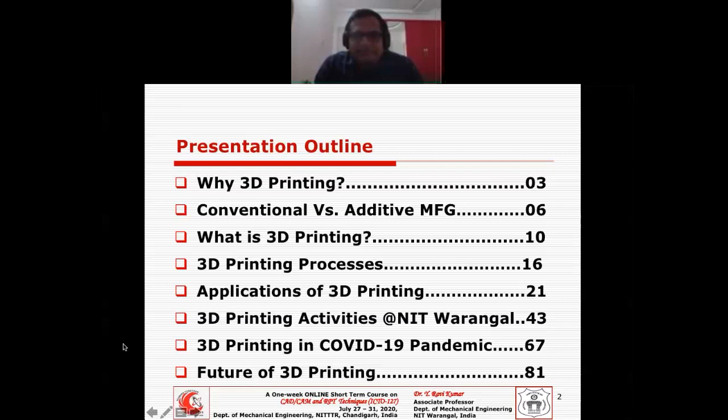And now we are under the pandemic, that is COVID-19. So under the COVID-19 pandemic, what role should 3D printing or the 3D printing community as such play? That also we'll discuss, the role of 3D printing under this COVID-19 pandemic. And finally, we'll discuss what could be the future of this 3D printing technology. So this much I have planned for this session. So let me move to the next one.

So why 3D printing? Why do you need 3D printing technology? That is the point here to discuss. So then we need to recollect the history of industrialization. If you see the time scale, during the 1780s to 1860s, that was the first industrial revolution, when the cottage industry, or when James Watt invented the steam engine. The energy used was steam or water.

So the idea of Industry 1.0 is mechanization, meaning replacing human muscle power with machines. That's called mechanization. So mechanical production systems came into the picture during the first industrial revolution. Then in the second industrial revolution, steam and water power were replaced with electric power. And of course, the concept of assembly lines, where Henry Ford at Ford Company started the assembly line concept. That was the second industrial revolution, called Industry 2.0, during the 1870s to 1960.

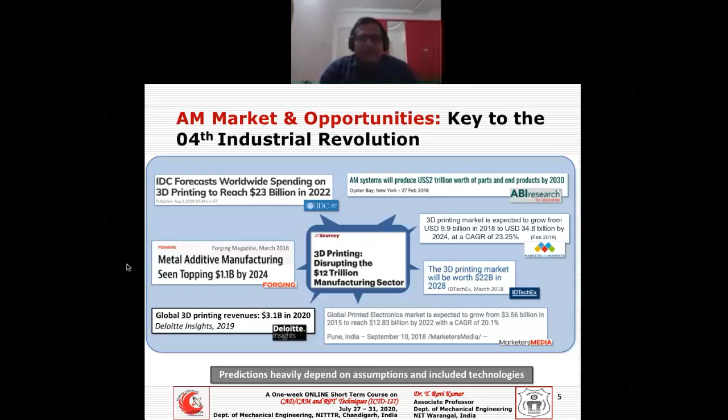So with that background, why additive? Why can't it be a conventional manufacturing process? Let us discuss the difference between conventional manufacturing systems and additive manufacturing systems. If you recollect the classification of manufacturing systems, we can broadly classify one as subtractive. Subtractive, as you know, for example, is machining.

There we take the raw material as a bar stock, and then we use tools to continuously remove or subtract material from the bar stock, and we need to remove a lot of material in order to get the required size and shape. And sometimes we need to design and fabricate fixtures to hold your workpiece.

The major concern in subtractive is scrap, which depends on the complexity. The complexity is directly proportional to the amount of scrap. That is the major concern. Of course, we also need to check for tools, jigs, fixtures, and so on.

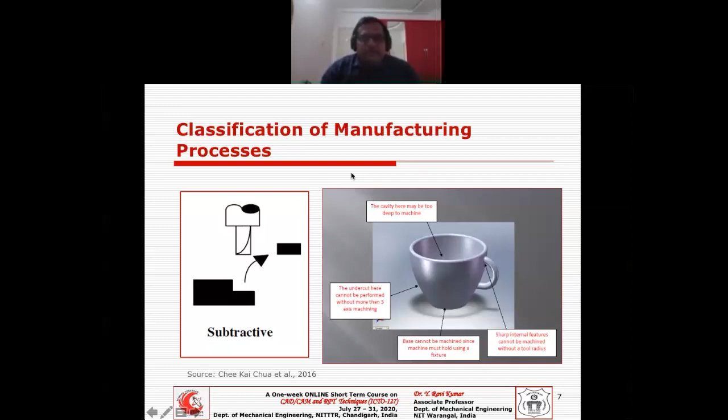And you have a very sharp internal feature here, so we need to go with tool radius compensation and things like that. These are some of the constraints we need to plan very well before starting the subtractive process. Whereas if you want to do the same thing through additive manufacturing, we don't bother about the constraints we discussed previously.

But what we need in additive is, say you have a simple step like this, I can discretize it into layers. Say I can have layer 1 and layer 2, and by using some kind of energy source, I can bond these 2 layers. So that's what you do in additive manufacturing.

So then we need not worry about the tools, not about the jigs and fixtures, and literally no scrap. Why? Because you are adding as per the requirement. So you are not removing anything here.

And of course you may have another kind of manufacturing system called formative. In formative, for example forging or casting, we need to make a die of the shape you are looking to fabricate. So we need to design and fabricate a die for each and every component you want to make with the formative process. And again, you may use a subtractive process to make the die.

So in the case of a formative process, we need to design and fabricate the die. But in the case of additive, you don't require any die to design and fabricate. We need only the machine and the digital model or the CAD model of your part.

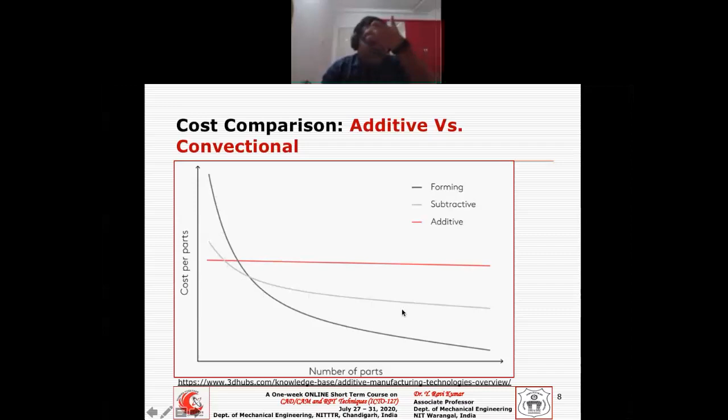And then you may wonder what the cost of additive manufacturing is compared with the formative and subtractive processes. If you draw the graph between the cost per part and the number of parts, for formative or subtractive you find a similar trend: if you increase the number of parts, your cost per part reduces exponentially.

But that is not the case with additive manufacturing. It may not reduce drastically; it is like a straight line, sloping slightly downwards. That is the trend we can expect from additive manufacturing for cost versus number of parts.

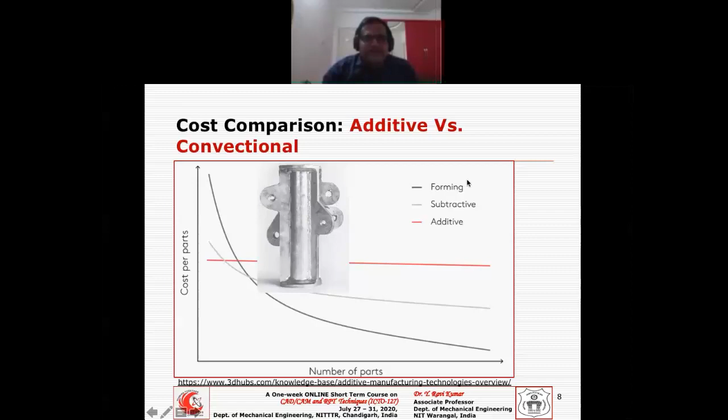But let me introduce one more parameter called complexity. Say my part is a cylindrical one with simple standard forms; then I can easily machine it or go with the formative process. But my product is like this. If you compare these two products, of course this one is more complex.

Why? Because this design is not a conventional design, rather it's a bionic design. The designer might have been inspired by nature or cell biology. It's an organic or bionic design, so of course it is very complex. If the complexity increases, you have to struggle a lot with the formative or subtractive process.

My intention with this slide is: if you take the additive manufacturing route, whether your product is a standard cylindrical shape or a bionic design, it doesn't care. It takes almost similar effort to fabricate either design. That is the biggest advantage of the additive manufacturing route.

And when do you choose additive manufacturing or 3D printing? If you draw the plot between complexity and quantity: if your complexity is very high and you need relatively few parts, 3D printing is the better choice. If complexity is medium and quantity is medium, CNC machining is the right choice.

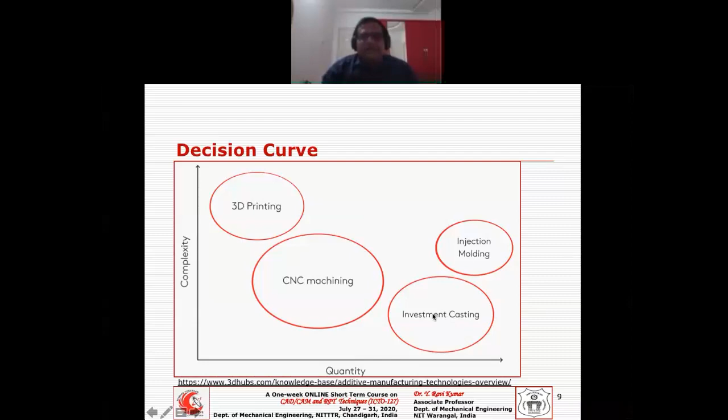But you can integrate these processes with 3D printing. In injection molding, I can make a die or a tool through 3D printing. And in investment casting, if you want to make the wax pattern, you can 3D print it. So it depends on the situation, application, or requirement.

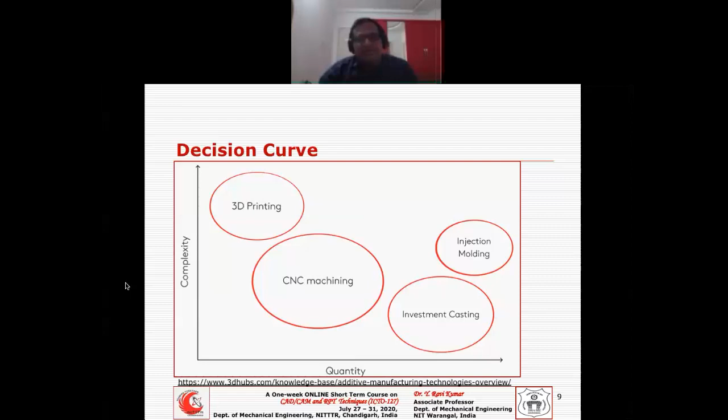So then you can choose the appropriate, or you can combine these technologies also as per your requirement. So then what is 3D printing? What are the various steps involved in 3D printing? So the idea of 3D printing has come again from nature. Normally, these inventors, or the so-called people who invent any technology, definitely may be inspired by nature.

Say, for example, how these seashells are formed. If you closely watch, they got formed layer by layer. It is not overnight it got formed like this. Over a period of days or months together, it might have formed layer by layer, and that too, nature got it 3D printed. So basically we can put it in that way. These are the best examples where nature has printed for us.

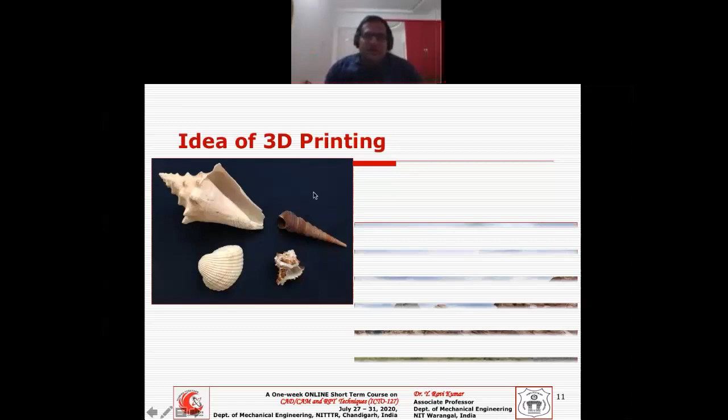And of course, we can have one more observation. How are these rocks formed? These rocks are formed by the erosion of the soil. That is not formed overnight, right? Over a period of days together, this erosion may happen, the soil got eroded and it may form layer by layer. So this is another example where nature has printed these kinds of products.

And of course, this man called Charles Hull. He might have been inspired by nature, but in 1982 there was a requirement for him to make a prototype, rather to make a plastic part very quickly. So that was the requirement. Necessity is the mother of invention, right? You know that. So with the requirement of making plastic parts, a prototype, he started experimenting through these kinds of systems

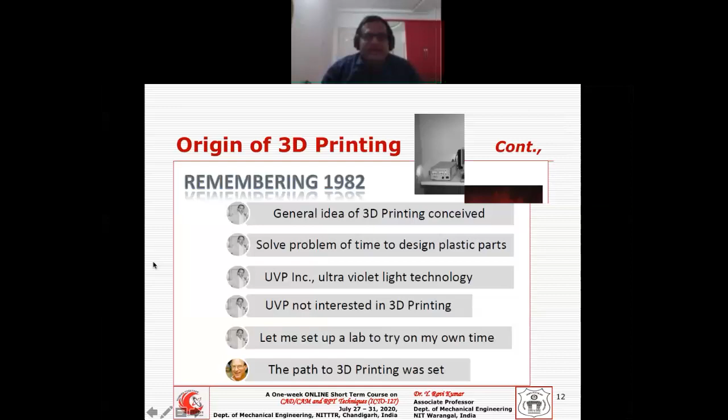during 1982, where he took some epoxy photosensitive polymer resin and started exposing it to UV light, and he found that the liquid is getting converted into solid; the solidification is happening because the epoxy resin got exposed to the UV light. So that was the origin, the history, and then this man filed the patent in 1982 with that idea, and he himself started a company called 3D Systems in 1988.

This technology is very popular, you know, stereolithography, called SLA. SLA was the first 3D printing technology. Commercially it was introduced by 3D Systems, by the same guy, Charles Hull, with the SLA 250 system, which we can see is the first 3D printer or rapid prototyping machine for mankind. And incidentally, he invented the STL file. The STL file is the de facto standard.

So now you are familiar with these terms, right? Rapid prototyping, additive manufacturing, and 3D printing. Whatever you call this technology, we need to have a CAD model, or a digital blueprint, to fabricate a physical object. First we need to start with some modeling technique, like a surface model or solid model or whatever it is. You start with the digital model, and then you fabricate and use it for the application. So that is one route.

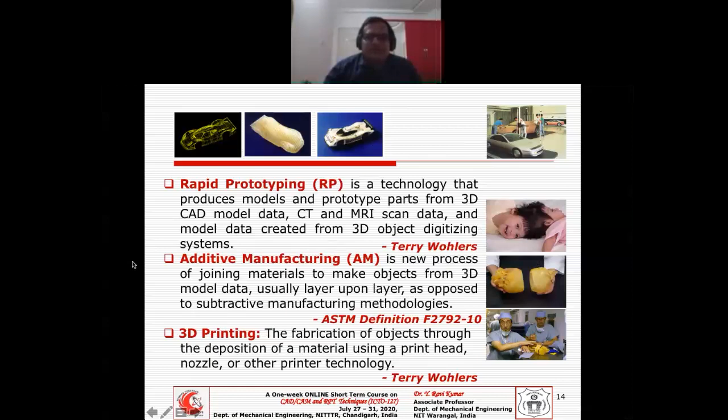So definitely 3D scanning, or reverse engineering, is another area where you can get digital data or point cloud data, and further you convert it into a CAD model and then you can print it. So that is another interface, through reverse engineering or digitizing systems. So you can come by any route, and then we can make a physical object using that CAD model or digital model.

And coming to the various steps involved in a 3D printing process. In this process, first we need to identify what the application will be. Say, for example, I want to sip a coffee. So I need to have a mug, a coffee cup, basically. So that is my application. My application is to sip a coffee. So then I can go to any CAD modeling software.

Nowadays, these softwares are very handy, and they are cloud-based or even browser-based, or even with your cell phone you can model very easily nowadays, free of cost. You have Google SketchUp, or you have Onshape, and you have other modeling softwares which are open, and they are cloud-based or browser-based, in fact. So then we can easily make this kind of a solid model. That's not a big deal now.

So once you have a CAD model, there itself you can save this CAD file as STL, .stl, that is a triangular model. So you save this triangular model called STL. Why? Because a 3D printer can understand only the triangular mesh language, or the STL file. So you save it then and there in the software itself as an STL file.

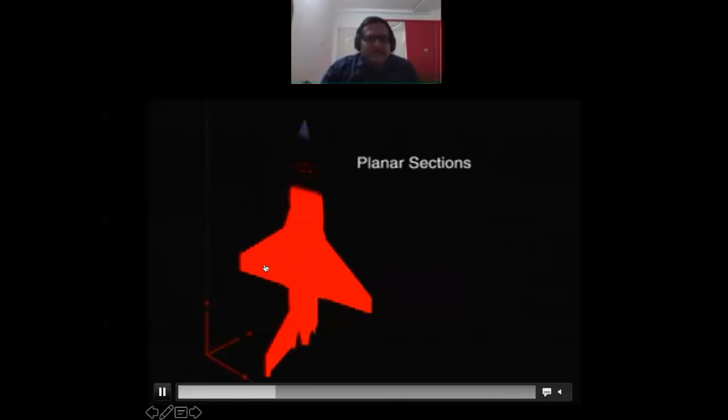Anyway, we need to fix the orientation and slice the model into layers, which is done in the software. So you slice the model into layers, and if there's an overhang portion, I need to give some supports. Once you've done the supporting, fixing the orientation, and slicing, then we need to generate a tool path, something like a G-code.

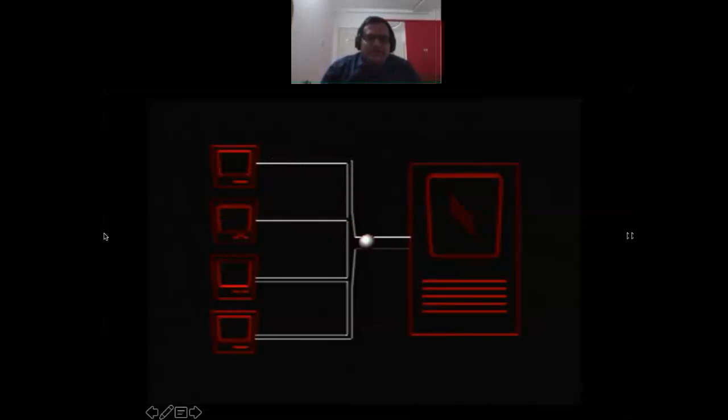But we are not writing any code here, the software will automatically generate it. That code will be sent to the machine. As I already said, this is FDM technology, and the raw material is a filament, basically in wire or filament form.

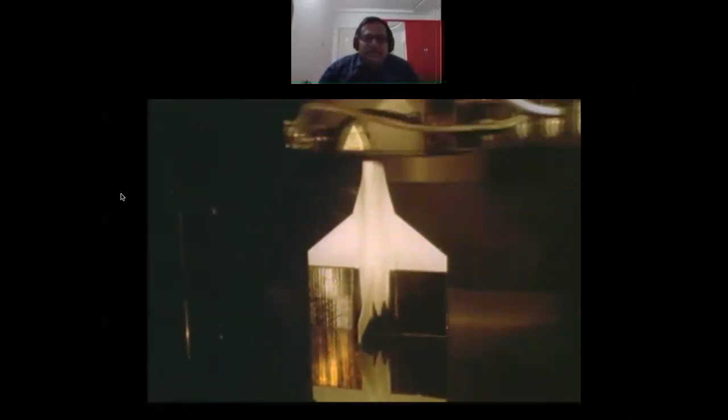So that plastic filament will come and get heated, rather melted, and come in a semi-solid or liquefied state. It falls onto the platform, one layer upon another, and gets fused layer upon layer. Once the first layer to the last layer is completed, and I have some supports which I've given, once I remove that support, my part—you can call it a prototype, a model, a component, or a product.

Nowadays you can use plastic also as one of the direct end-usage parts. So that is about polymer printing.

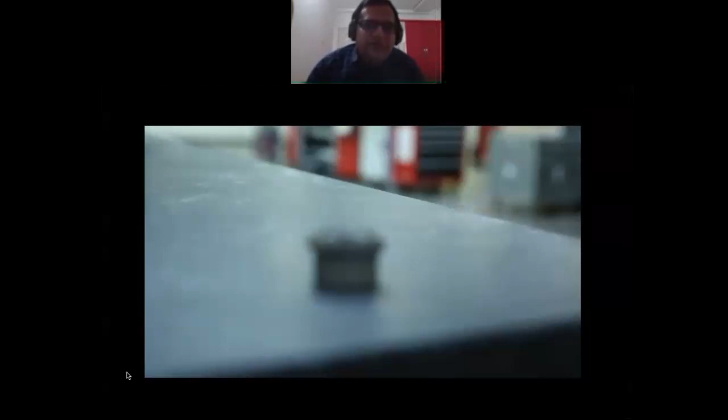And nowadays you can even print in metals. So metal printing is happening. The raw material here may be a powder—you can see this metal part, stainless steel 17-4 steel, where the raw material was taken as a powder. From powder to the product, the metal product like this, we can convert.

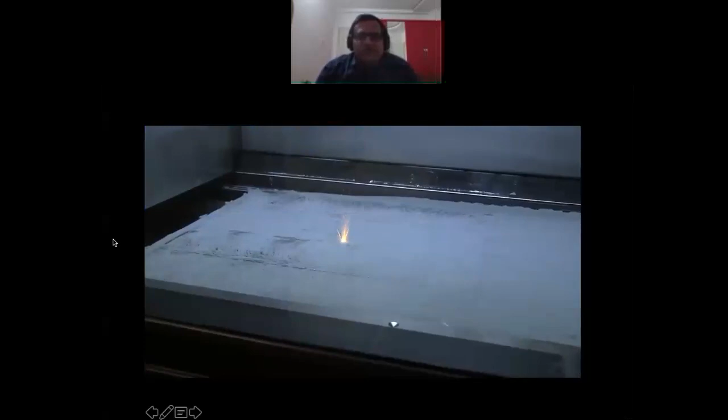So how do you convert? Here you may use a laser to melt these powder particles, and finally you're going to make this kind of metal part.

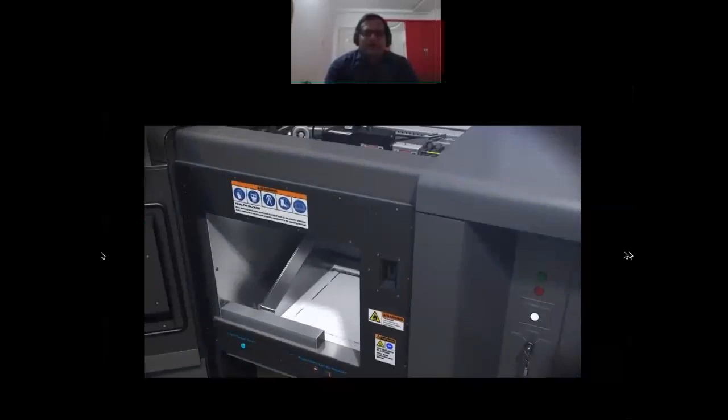So of course, whether it is a polymer or a metal, we need to start with a CAD model. In the CAD model, we need to slice them. But that slicing layer thickness may be less here compared with the previous FDM technology. It depends on whether you are processing a polymer, metal, composite, ceramic, or even biological cells.

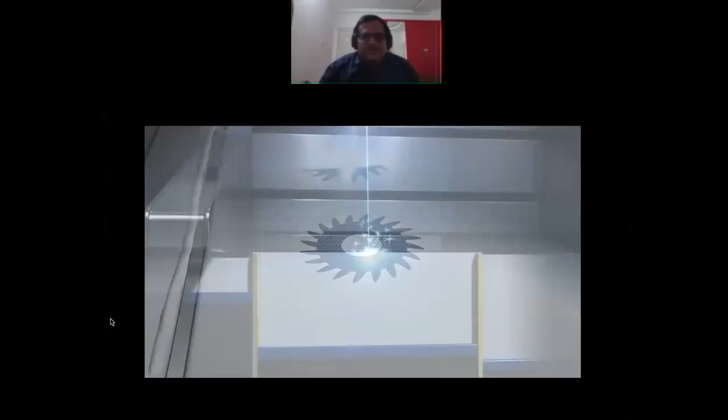The recoater will spread the powder particle onto the bed, and the laser will come and trace the cross section, which you already defined in the software. As for that cross section, the laser will only melt those powder particles according to the cross section. Once one layer is over, it comes down to the next layer, and so on, from the first layer to the last layer, as your laser melts.

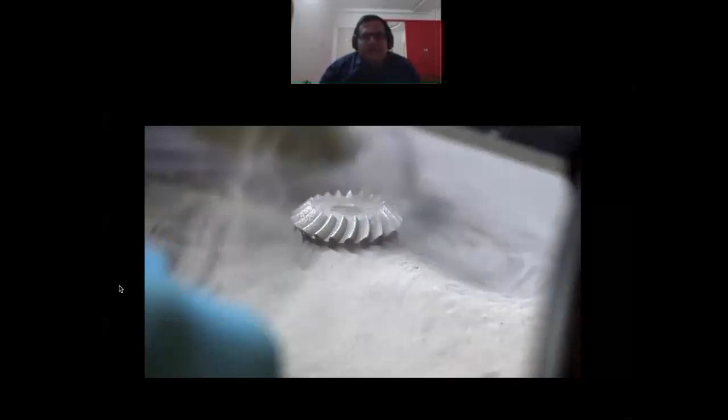We can reuse that metal powder actually. Wherever you have a cake of powder, you might have used only a small portion, so then you can reuse that powder.

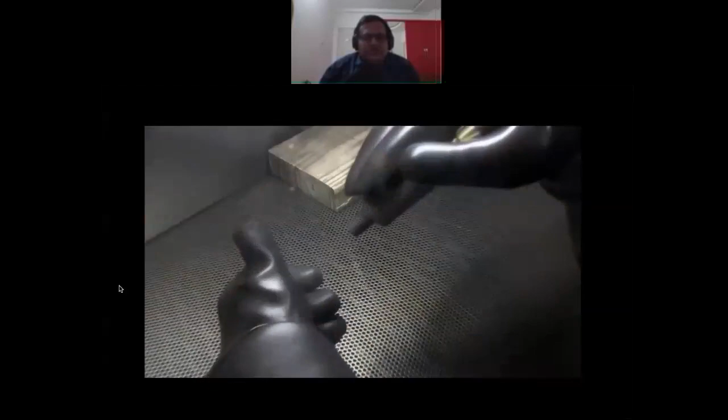Then you take out the part from the substrate and remove the supports, either by hand or using some kind of wire cut, hand filing, or finishing tools. Of course, use sandblasting or shot peening methods to enhance the surface finish or quality of the part. Sometimes you may also use furnace treatment to improve the metallurgical properties.

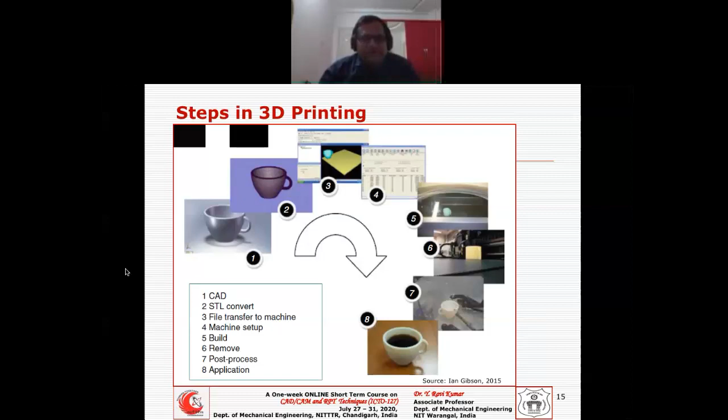So this is what you do, either for polymer printing or metal printing, or even the same case for composites, or the same case for ceramics. You can do it absolutely, no problem.

Then we'll discuss some of the 3D printing processes. As we have seen in the previous video, we could process polymers using technology like FDM, and you can even process metals. Some technologies like binder jetting let you process ceramics, and of course you can process composites again from FDM or from the binder jetting process. Not only the standard polymer, metal, and ceramic composites—you can even print functional materials like electronic materials or shape memory alloys.

Nowadays you have smart materials like shape memory alloys, or electrogels, or other things which we can even print. And not only functional materials, we can even print biological materials like cells or tissues, or food can also be printed. This is one of the most interesting areas where you can even prepare your food. So, to name a few, these are some of the materials.

And the raw material form, as we have seen in the previous video, may be a powder in one case, a filament as in FDM technology, a sheet, or even a liquid. You have 7 classifications broadly by ASTM. Of course, there are different technologies and different proprietary and trademark names, but broadly it should be any one of these 7 processes.

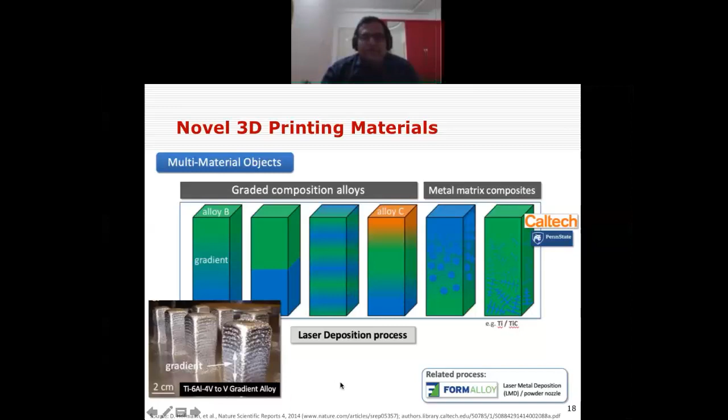So then you use the 3D printing or additive manufacturing process accordingly. Nowadays, with Industry 4.0, your manufacturing facility should be smart enough - you must create sensors, an in-situ monitoring system, or a closed loop feedback system, so we can closely monitor the process, and if something goes wrong, automatically correct those defects. That's how smart manufacturing is incorporated. You can have artificial intelligence, machine learning, and deep learning techniques to understand the process and automate it, to make it smart. So then we need data analysis and artificial intelligence support, and you can incorporate this kind of intelligence into your 3D printing technology.

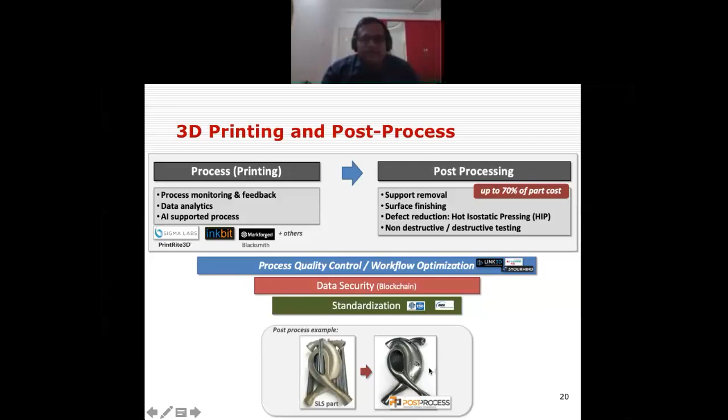So this is a brief, and then let us come to the next topic on 3D printing applications. So far we have discussed the need for 3D printing, traditional versus additive manufacturing process, various steps involved, various materials and processes, pre-processing, processing, and post-processing. Now we'll find out the applications of this 3D printing or additive manufacturing technology.

And if you see each and every area, like you talk of prototyping, time is most important. We need to quickly produce our design development, the product development should be faster, right? So then definitely in 3D printing we have less supply chains. In case of prototyping, using 3D printing is more faster and less expensive, and may allow complex designs also, which otherwise is not possible with the conventional process.

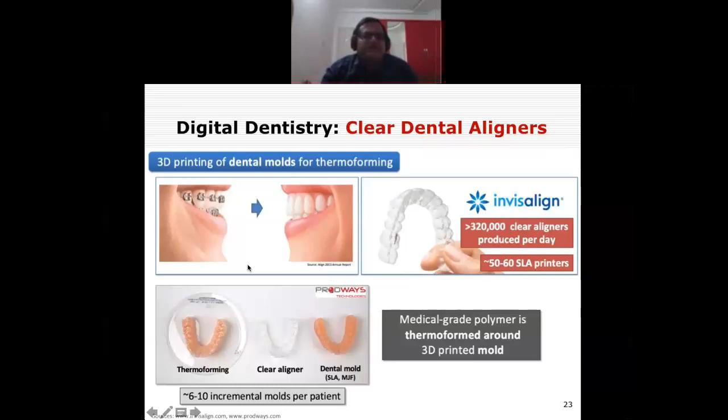So you have huge potential in a country like India to have a business setup. Nowadays these 3D printers are very low cost. You normally use SLA technology for this. DLP technology is very cheap nowadays; you can have a DLP machine for 2 lakhs or 3 lakhs, and the material is also very cheap now. You can even start a business in this domain. So that is another business potential.

And of course, you have hearing aids. For a hearing aid, normally there are standard sizes and shapes: L size, M size, XL or double XL. But 3D printing and 3D scanning will enable you to customize the size of the canal of a patient. They will scan the canal, and then you can print as per the size, shape, and geometry of the patient. So you have mass customization; millions of people may require these kinds of solutions.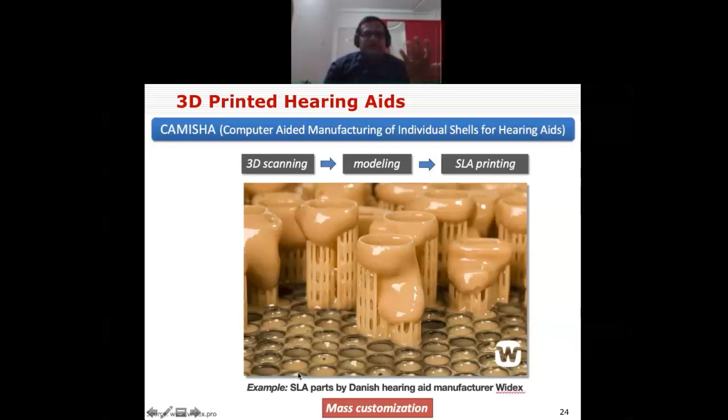So you have another big advantage if you use a scanning technique, modeling, and further use SLA or DLP technology to print it. It will give you a mass customized solution, a very good business strategy to adopt.

So it is almost like substituting the actual bone, but functionality and then how it is getting integrated. So you may have a bit of challenges, but it is quite an attractive field where the implantation will be done with 3D printed parts.

And you can use personalized medicines also for drug delivery systems. You can customize the dosage to the patient. So that is another area where 3D printing is helpful for medicine in general.

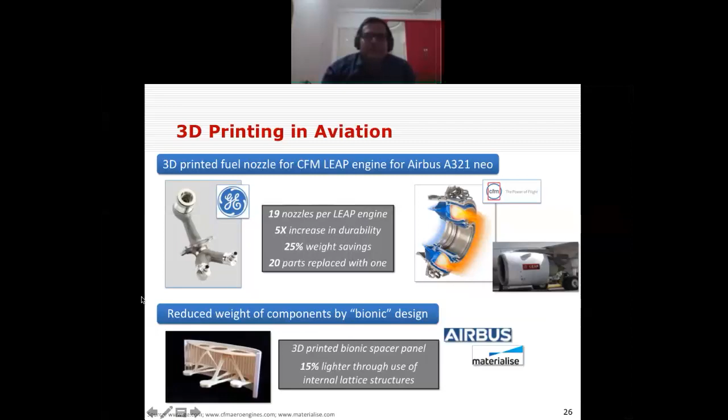And this is another case study where you will be using a gas turbine engine part as a 3D printed metal part. And of course, lightweighting is a bionic design, right? It means you will be inspired by nature, the bird or something like that, so you can further scoop out the material and reduce the weight. So it is either from Boeing or Airbus. They are claiming it is 15% lighter than the traditional designs. So like that, we have plenty of applications.

So very soon we are going to see these. The advantage here is that we can reduce a lot of supply chain, whereas traditionally we have to identify what kind of machine, who is the supplier, who is the manufacturer, who is the designer. So you have a lot of supply chain issues in traditional manufacturing. But here it's straightforward. You have a metal printer, you have a material, you have a design. Your job is done. You don't have much supply chain here, and of course the number of components is also reduced, as we know the previously 20 parts are reduced to a single part.

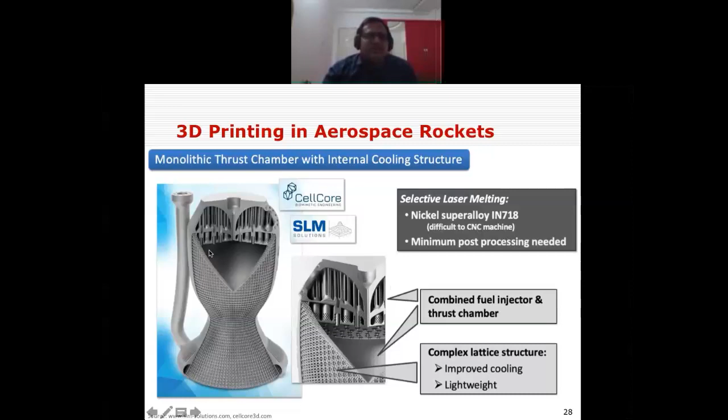And of course heat exchangers, the same logic will work out. We can make a lattice structure, which is very complex, rather than the bio-inspired designs. It's more lightweighting, and not only lightweighting, as you know with heat exchangers, the basic requirement is to extract the heat. And nowadays people are able to print even copper. Earlier it was a big problem printing copper, but now people are able to print in copper. As you know, copper is supposed to be a good conductor among all metals.

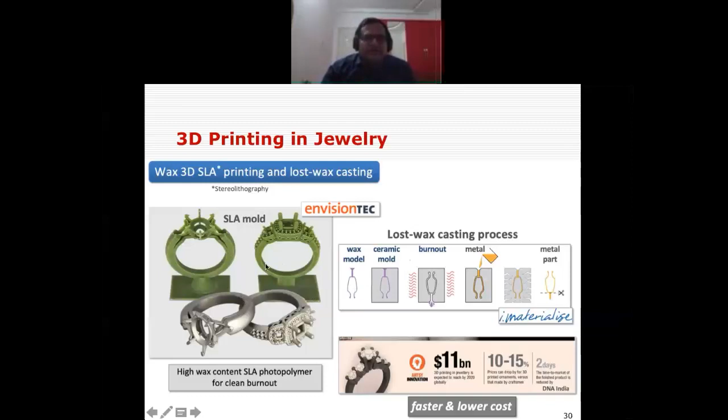So these are some of the 3D printing applications in jewelry. As I already mentioned, in India you have a very good scope. This is only from the Indian statistics. So you have plenty of customized designs. Normally you do investment casting, that's a wax pattern or sacrificial pattern through 3D printing, and then you can cast it. Otherwise now 3D printers can print directly even gold to some extent, and you can even print silver or platinum, titanium. So directly or indirectly through investment casting, you can make your customized designs.

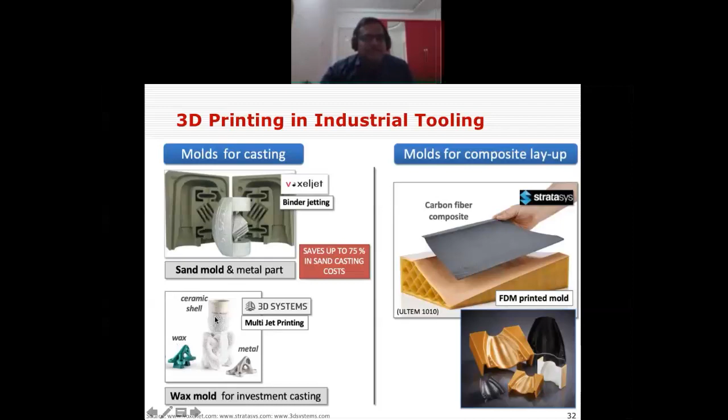Coming to the tooling area, you can make sand cores or sand molds through 3D printing, and further you can cast in metal. This is through the binder jetting process. You can save almost 75% of the cost if you go with sand casting. So that is the cost savings. And you are going to get properties on par with the cast product. And you have wax patterns, ceramic shells, metal parts, and some tooling applications.

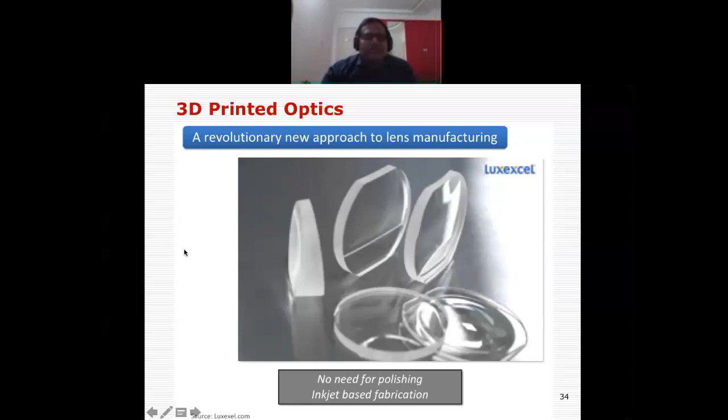And nowadays you can find 3D printed lenses also. Traditionally, polishing is a major challenge in lens making. But here it doesn't require any polishing, since it is 3D printed. So you have plenty of advantages once you come to the 3D printing route.

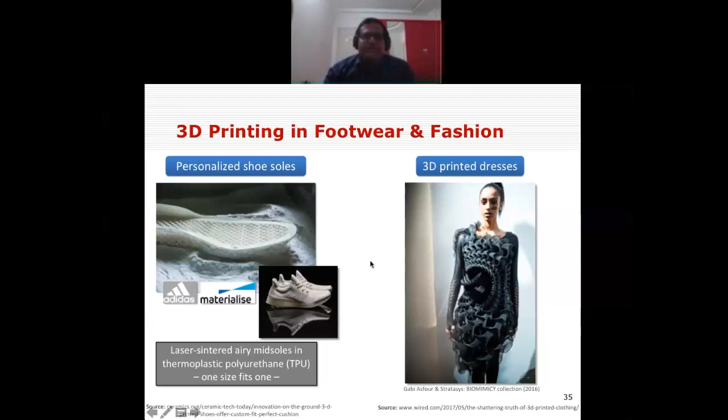You have personalization of shoes, like Adidas and Nike. They are coming out with printed lightweight lattice structure based soles. Maybe for athletes, or for diabetic patients, or arthritis patients who require a special design, as you know they have different pressure points, so it's going to give a good solution. And of course you have the 3D printed fashion industry, inspired by nature or bio-inspired designs, so you can 3D print these. And of course you have art applications of 3D printing.

And then you have some futuristic applications also, like now people are even able to print organs, 3D printed organs. So how do they do it?

So whether it is cardiac ventricles or other complex organs, people are targeting them. But anyway, this is at the initial stage. But some simple organs like skin and blood vessels, people are able to transplant, or people are able to repair those kinds of simple organs. But complex organs may take time.

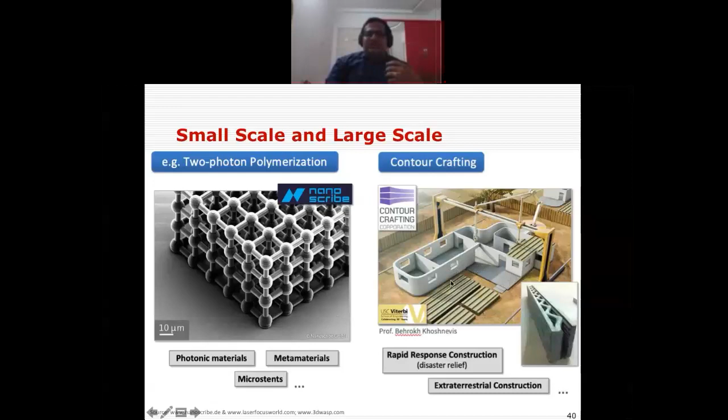And you have buildings or construction, with processes like contour crafting, with which you can even construct a building like this. So that is the biggest scale you can have, under the construction application for the construction industry. And of course you can have futuristic applications, where robots can be used to integrate with your 3D printing process to print structures like this.

The robots got integrated with 3D printing systems to print structures like this, from Nanyang Technological University, Singapore. They are developing it, and of course GXN Denmark. They are integrating unmanned aerial vehicles with 3D printing. As you know, the advantage of these robots or unmanned aerial vehicles is that they can crawl, swim and fly, right? So during any one of these actions, they can even 3D print.

So that is the basic idea, where you could integrate two cutting-edge technologies like robotics or unmanned aerial vehicles with 3D printing. So that is going to be a wonderful idea to work on in futuristic applications.

And let me come to the other application, as many of us are from an academic background. So how is this 3D printing technology helpful for education? Nowadays you have DIY kinds of 3D printers, thanks to the RepRap movement, after the patent of Scott Crump expired after 20 years. So then you can have an open-source kind of architecture.

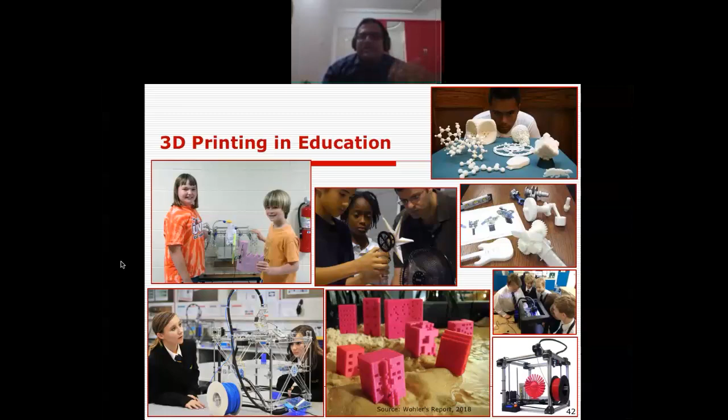For CAD models also, we will not design right from scratch. Probably the organizers have already given some forums where you can download CAD models free of cost, from repositories like Thingiverse, GrabCAD or MyMiniFactory. You have plenty of repositories or online 3D printing communities keeping these designs open. You can download standard designs or customize them, and use them for education or any other purpose.

And let me come to what we do at NIT Warangal with this 3D printing. Let me give a small glimpse of some of the activities. Coming to the facilities, we have a metal 3D printer from 3D Systems. And of course, NITTTR also has the same technology, and their machine may be bigger than ours.

So ours is the 100 and theirs is the 200 model, but the working principle is the same. That is a powder bed fusion technology from 3D Systems, which can process steel, aluminum, cobalt-chrome, titanium, and nickel-based alloys like Inconel. So you can very much process these metal powders on this metal 3D printer, or you can develop your own material to process on this metal 3D printer.

And of course, we have Stratasys-make FDM machines, the FDM Dimension series and FDM Mojo, and we have an Ultimaker 2 Plus machine, and we have a couple of scanners also. And we have a muffle furnace to treat the 3D printed metal parts, and a shot peening machine. And we have specific 3D printing software for the medical research which we do.

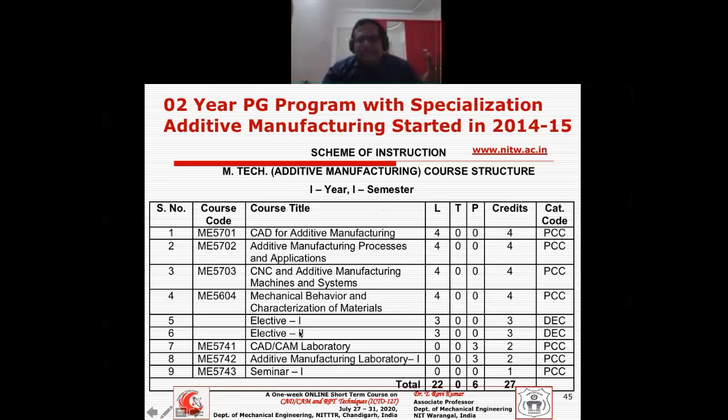Nowadays, AICTE is making compulsory, or rather optional, BE honors or minors in all 9 thrust areas, and additive manufacturing or 3D printing is one among them. If somebody is looking for such kind of activity, we at NIT Warangal are open. We have already developed around 27 credits in the first semester and 25 in the second semester, so we are able to help you frame a syllabus.

So just an idea of where you can integrate 3D printing technology in your student projects, like in automobile engineering or IC engines. Just a thought, you can even use it for any other application where it is appropriate.

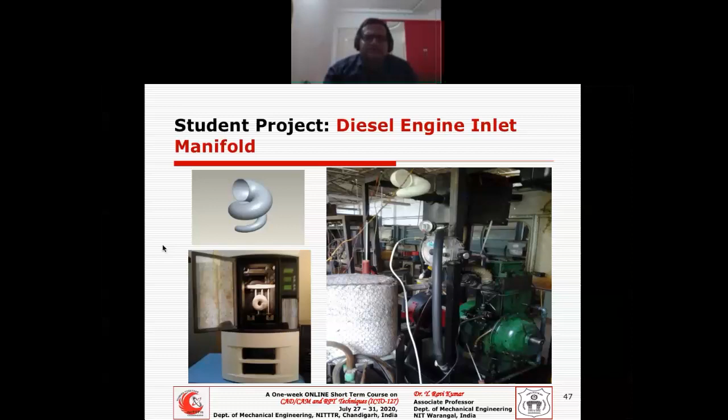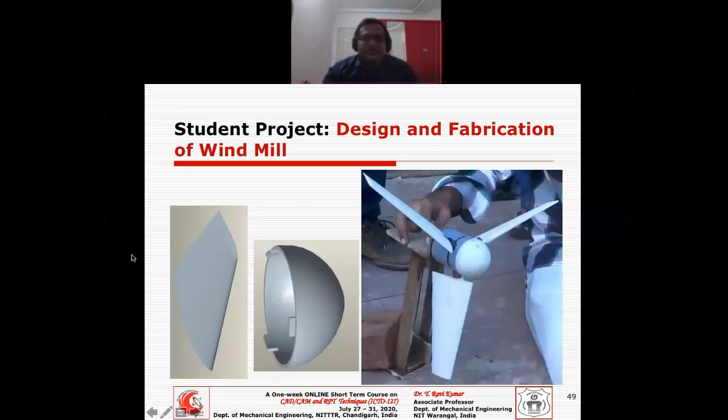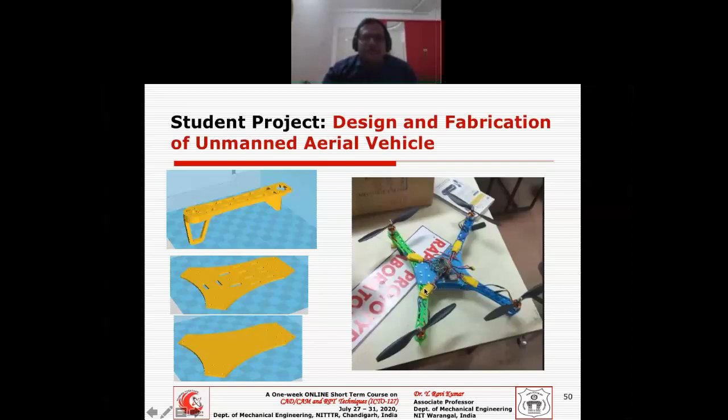And one of the students made an unmanned aerial vehicle, where except the electronics, the frame of the quadcopter can be 3D printed, and you can use lattice structures for lightweighting to increase the payload of the unmanned aerial vehicle. So we can very much use this technology for printing unmanned aerial vehicle structures.

So these prosthetic hands, which you can even customize for the amputee, right? So of course we need to start with a CAD model of the hand or the prosthetic, and you have to start with any CAD modeling technique, for example ProE or SolidWorks, or nowadays you can have open source software to do this.

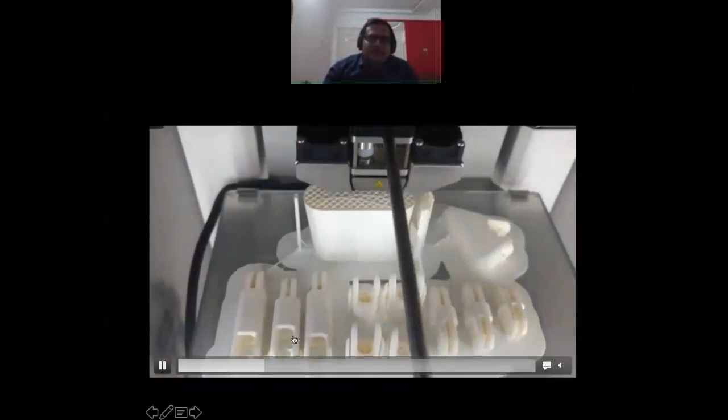So once you're done, the next step is to go and print these finger joints or whatever prosthetics you have designed, and further it got 3D printed. And then you have an EMG sensor, and these students are very smart, right? How you can use this technology, taking an EMG input, the sensor input from the normal hand, and further it will be taken from the amputee, or the person who required a prosthetic hand, an artificial hand to be fitted.

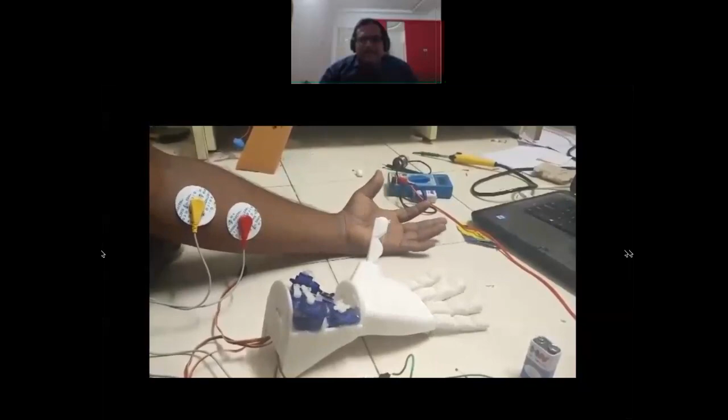So then even it can be tested with that amputee to use the prosthetic hand. So we can again give this kind of EMG sensor input, and we can see this is still at the prototyping stage, but still we need to improve some things to do that, but we are working on that. Just an idea of how this 3D printing can be helpful for the student to use it for their BTech project or MTech project or things like that. So being a teacher or a student, we can use this technology.

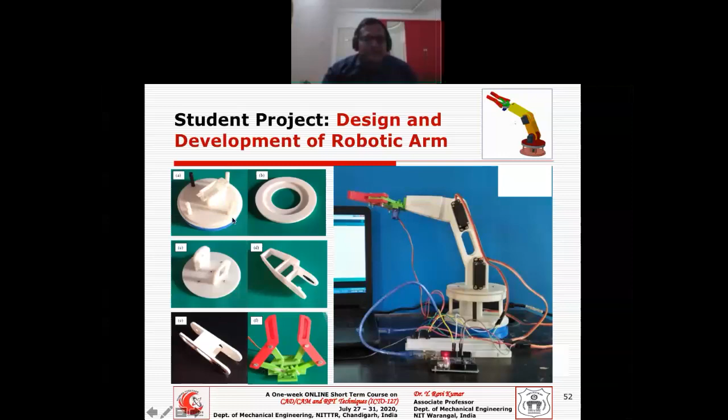And of course, one of my other students made this entire robotic arm. So we can design these grippers and all these links through 3D printing, and of course you start with CAD modeling of these parts, either using software like Creo or any other modeling software.

So then we make all these parts, and further you 3D print them. Once you 3D print them, you assemble the entire setup, which has the gripper, including gripper and everything. So this is the full assembled view of that one, and we can interface it with the microprocessor controller kind of stuff.

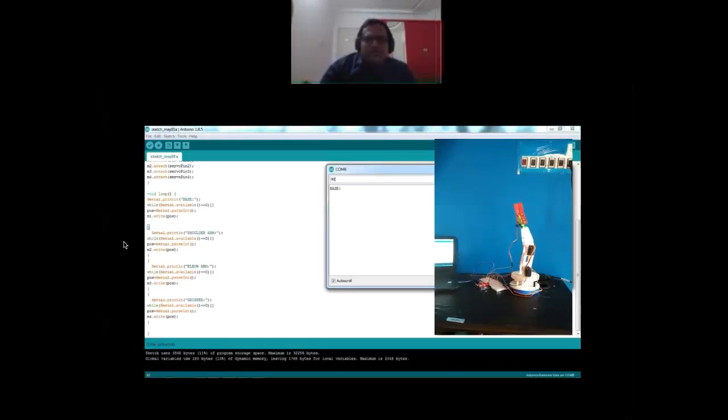You can do some Arduino programming to integrate or to make this robot a working pick and place robot. So we tried initially with a manual option, and these parts are also available from some other open source sources, which you can use to do kinematic simulations. So that can be taken from open sources also.

That's what we have done, and then we made it a more automated thing also here, where it can pick and place. The robot is picking and placing the kind of pallets or work pieces like this. So just an idea I'm giving here, like how we normally use this technology for the project's sake.

And we do a kind of medical research also with the craniofacial surgeons, where we need to use this Mimics software for doing modeling of this kind of customized implants. And of course the challenge here is how to mimic the bone which a patient has lost during the accident. The biggest challenge is the thickness of the shell, the skull, which is not uniform.

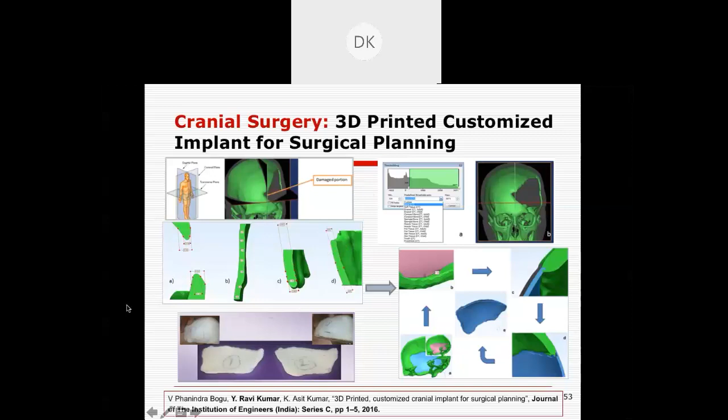And of course it should be taken from the patient data and CT data, and further we do the modeling, and then we have fabricated it, and in fact we have used it for planning the surgery for a craniofacial surgeon. And of course we have done a good amount of developing algorithms.

Normally the traditional conventional proprietary algorithms may find it very easy to do a kind of mirroring option, meaning if the defect is a symmetric defect. But we come out with a defect which is beyond the midline also, which we have published in journals also.

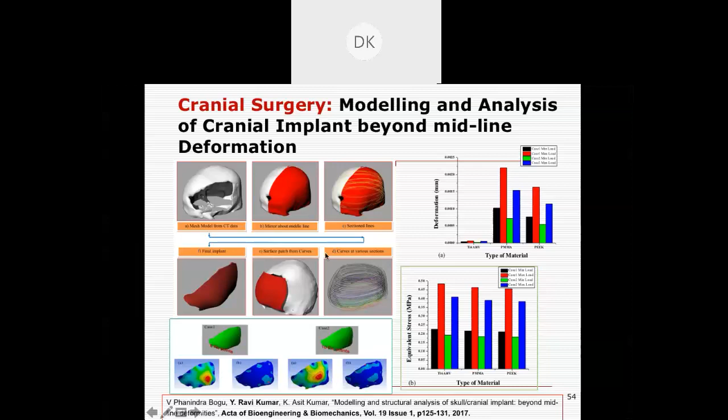These data, if somebody is interested, you can go through it. We have developed our own algorithms to develop these kinds of NURBS-based surfaces, and how to fix the fixation points so that the pressure of that fluid is uniform. We have done a lot of study on this, like simulation analysis, and fabricated these kinds of implants.

If you watch your skull closely, the skull bone is a combination of a spongy bone and a hard cortical bone on either side, with a porous spongy bone inside. There's no other way to mimic this kind of bone anatomy except through 3D printing. You cannot machine this kind of porous structure combining a hard surface with a spongy surface in between. That is the beauty of this 3D printing technology.

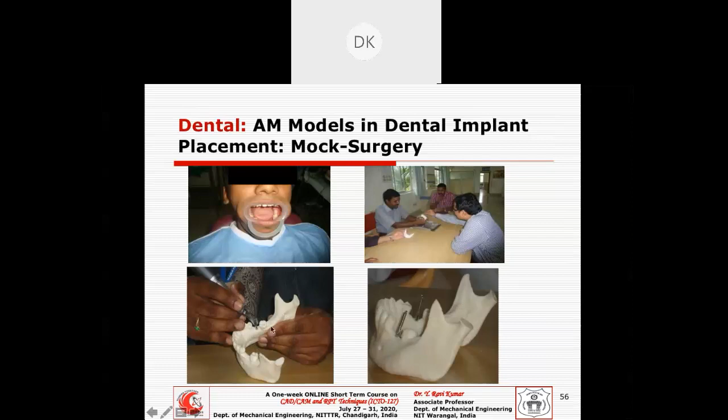It's quite suitable for the dentist, where you can use these biomodels to plan or rehearse his surgery - where you need to implant, what will be the size of the implant, and what orientation he needs to drill and fix the implant. That's where you can use this 3D printing technology for planning the surgery or placement of implants during the surgery.

We have also done reconstructive surgeries with the oral maxillofacial surgeon. Normally a person should have a semicircle kind of configuration, but because of a defect or birth defect, we can see there is asymmetry. So there is a beautiful medical procedure called distraction osteogenesis.

The idea here is we need to stretch the bone. You can see this ramus height is different than the other one, so it should be stretching - this length, or otherwise we twist it. So this twisting will happen, extending this ramus up to a certain length. That is the idea.

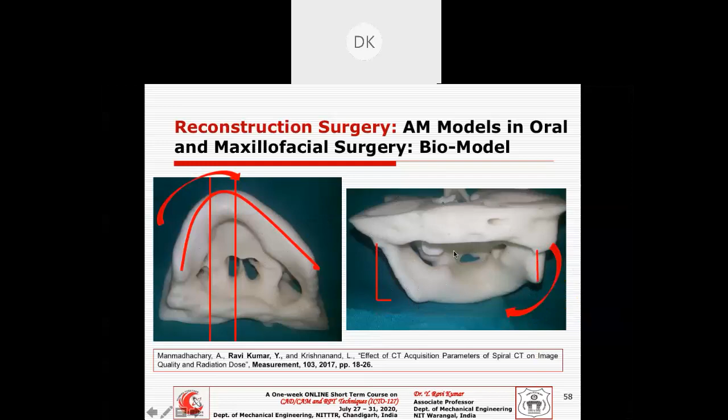How to do that, and all the calculations and measurements, we can do on these biomodels which are derived from the patient, as you can see. This is the initial patient condition before the surgery, and this is after the surgery, where you can see the kind of bone reconstruction that has happened, from initial to final. This is what normally you do for an oral maxillofacial surgeon.

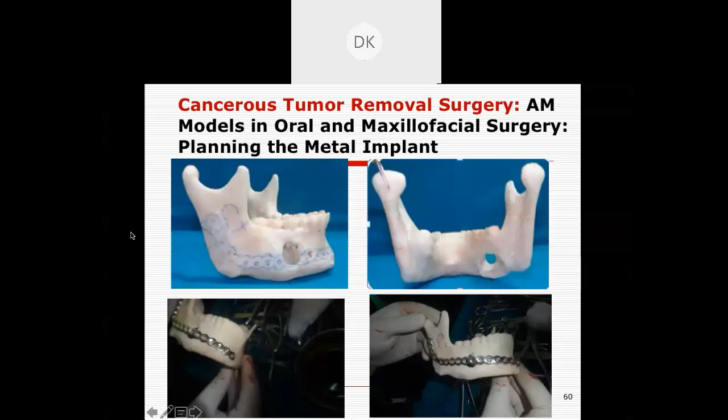We have taken another case - this is a cancerous tumor caused by using tobacco products. You can see the bone affected by cancer because that person might have been keeping tobacco here. Normally they use some kind of standard plates to fit on this, and do bone grafting. But here, we can customize indigenous implants that can be developed and printed, and fitted during the surgery.

So this is another area where you can use implants inside the body. This is another case study where we were successful in implanting - one of the TMJ reconstruction cases. This requires a kind of distractor, and the distractor calculations are based on the model we derived from the patient, which you can see during the surgery.

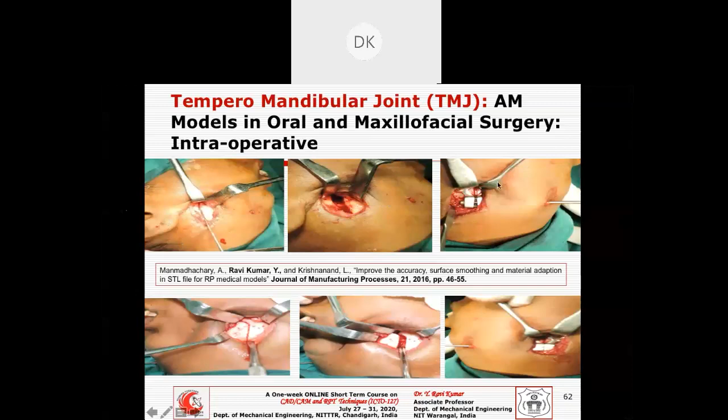The bone got cut open, and this is a distractor - the bone has a beautiful mechanism of natural growth, so we have this distractor device to control or guide that growth. This is during the surgery where we can see how it's going to be - we need to cut this portion because of fusing, cutting this joint, virtually and then physically during the actual surgery.

Whatever implants we designed and fabricated are fitted and fixed here through the guides. With the help of the guides and screws, it will be fitted onto the lower jaw as well as the upper jaw, and this is what it's going to be.

We have filed patents for this kind of work. This is another case study where we were successful in implanting a customized implant. Why? Because the patient broke his bone as well as his teeth. So the challenge was how to fix these implants. That was the biggest challenge.

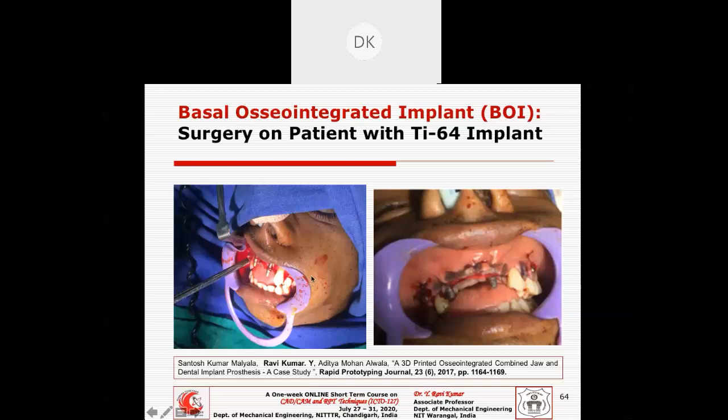Anyway, we have done this with 3D printing, and we've done exhaustive work on metal 3D printing too, in order to optimize the process parameters of the DED system. We don't have this facility ourselves, so we work with RRCAT, who have this DED system. We have done good experimentation and some simulations as well.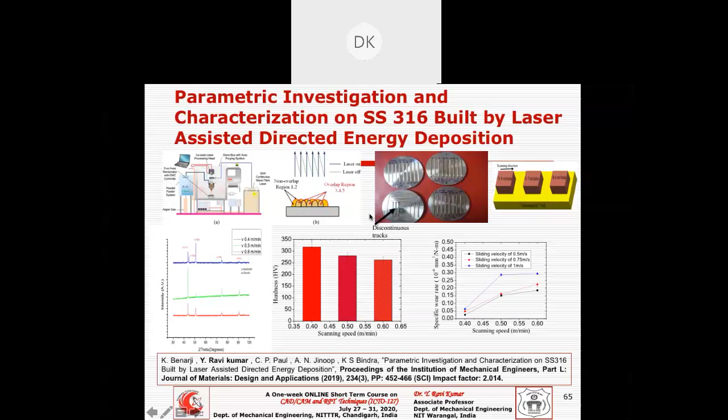So the idea was how to improve these properties by experimenting with several process parameters like laser power, scan speed, filling strategy, and so on and so forth. We have published this work, so if somebody is interested, you can refer to it.

We have also done a lot of post-processing of this steel, and we've worked on some other alloys too. The basic idea here is that through post-processing, the ferrite and austenitic structure becomes purely austenitic structure.

After doing a heat treatment normalizing process, we can enhance the properties. This is as-built, and this is after treatment at 1073 and 1273 degrees Kelvin, where we can see improvements either in terms of wear property or other microstructural and mechanical properties.

So let me come to the last part of my presentation, on how this technology is helpful for the COVID situation. As we know, the most demanded items are things like goggles or face shields.

Once you have a 3D printer at your home, you could print all these things yourself, because these designs are open sourced. You can download them free of cost by visiting some 3D printing community repositories. You can print them, or if you want to customize them for your size, that can also be done.

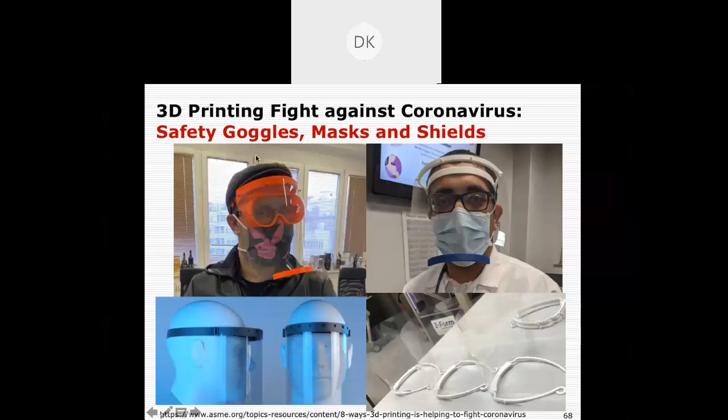So you can use 3D printing for safety goggles, masks, shields, and even stopgap masks. You can install these 3D printers in hospital premises and print there, eliminating contamination risks. Otherwise, we don't know where it's getting printed and whether it got contaminated. But as we know, 3D printing allows you to compress your supply chain, so you can install these printers directly in hospitals and get things printed there.

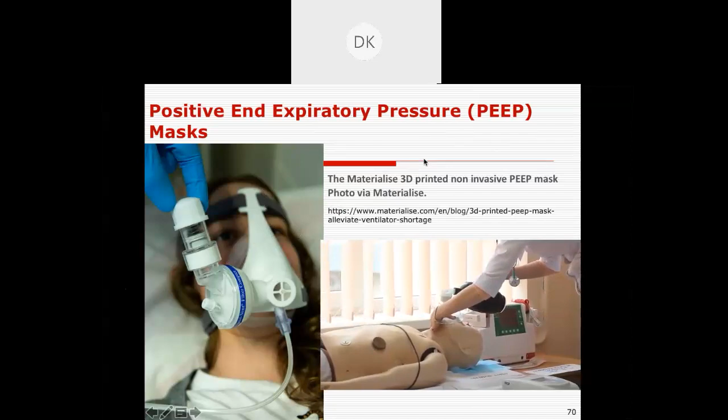People are also looking for alternatives to ventilators. It's quite possible to use 3D printing technology for printing masks or valves, like PEEP valves, for patients who require oxygen supply.

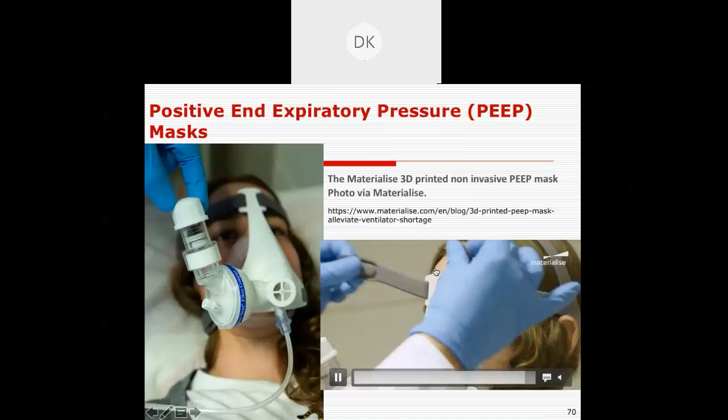We can design and fabricate these masks or valves which connect to oxygen supplies, depending on the patient's condition. Not all patients require a ventilator - some people may manage with an oxygen cylinder or some exhaling mechanism. That is very much possible.

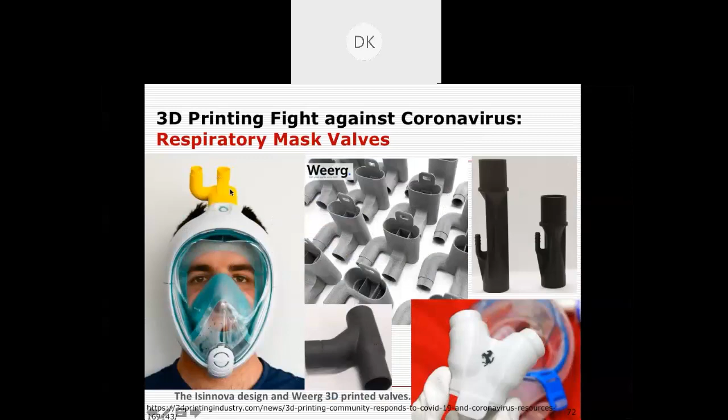You can also print mask valves connected through oxygen blowers for supply - you can see these valves are 3D printed. And not only that, there are also oxygen valves fitted to ventilators that are printed as well.

As you know, the demand may be 200-300 pieces per day, so you can 3D print these things. And of course, the other area is nasal swabs for rapid test applications - you can print diagnostic nasal swabs. This doesn't require a big investment.

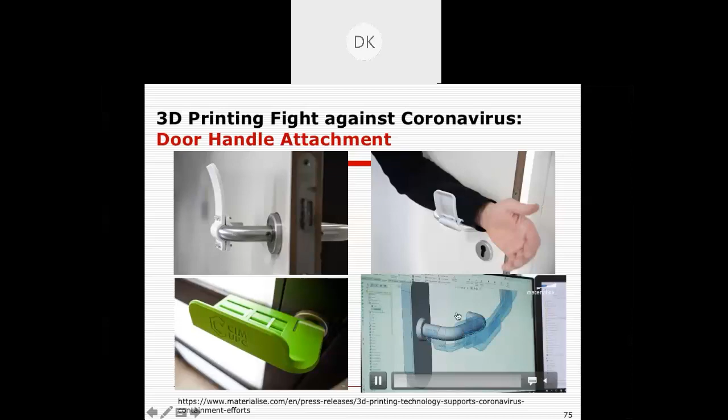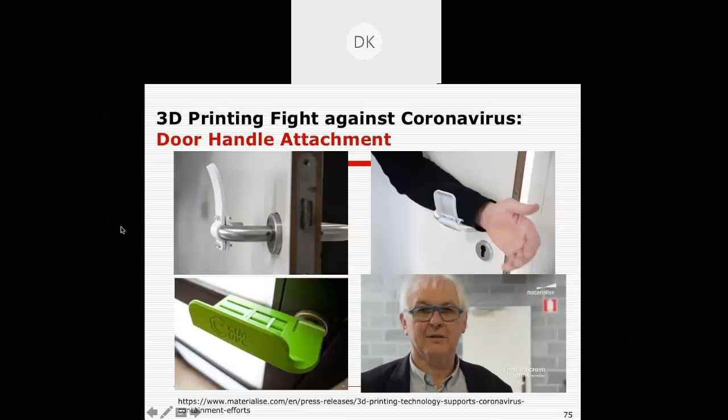for the rapid tests. And this is where India needs these kinds of rapid tests to be done. And of course, nowadays you can find these kinds of things on Amazon, but you can even find them on the Materialise website, where you can download them free of cost. Once you have a 3D printer, you can print them for the configuration of your door or whatever, multi-purpose, for handling things.

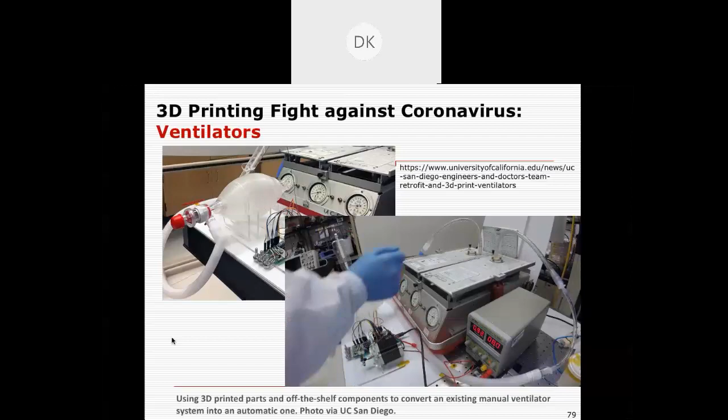And of course, people are looking at converting manual ventilators into more automated ventilators, through 3D printing plus some electronics, motors, things like that, and people are able to do that also. People are looking for whatever possible ways to get ventilators or ventilator components in a more automated fashion.

So let me conclude here. What could be the future of this 3D printing technology? So far we have discussed several applications, including COVID-19 applications. The future is definitely going to be one dimension extra, that is 4D printing. MIT has coined this term 4D printing. So what do you mean by 4D printing? Normally you have 1, 2, and 3 dimensions. But what about the fourth dimension? The fourth dimension may be time. 3D printed structures are normally static, whereas 4D printed parts become more intelligent, dynamic structures.

How is it possible? You must have a smart material like shape memory polymers or hydrogels, and some stimulus like temperature, water, or energy to transform 3D printed dynamic structures over a period of time. So it gets transformed, whether it's a medical application or a non-living application. That is the beauty of this technology, and we can experience 4D printing very soon. It's already there, but at an initial stage, with a lot of modeling. If somebody is interested, you can visit the MIT website to know about 4D printing.

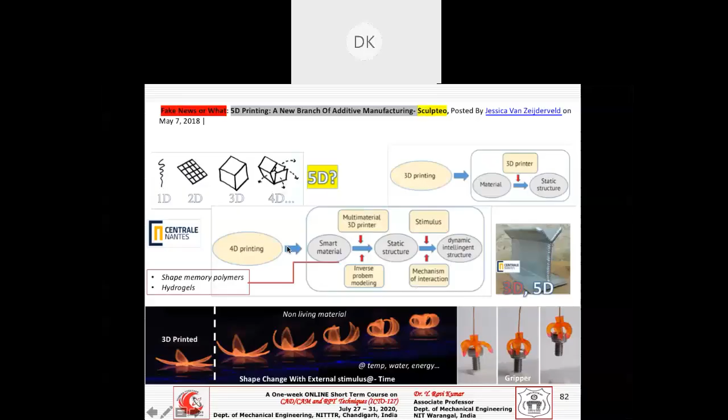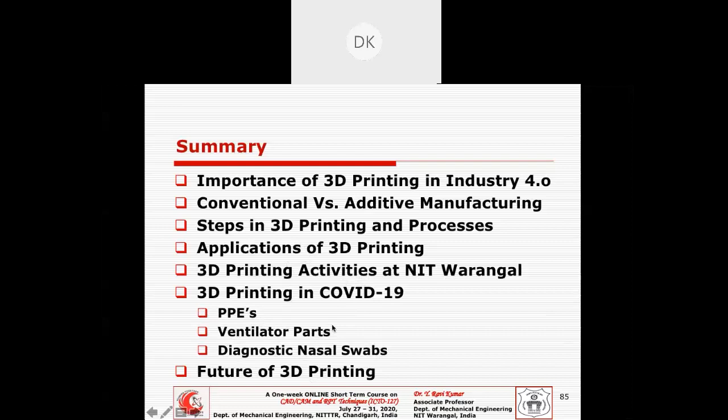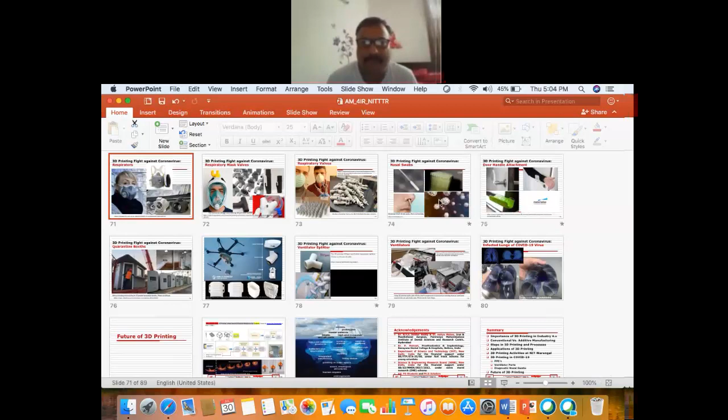So participants, if you have, okay. There is one question. What about the mechanical strength of the 3D printed parts as compared to the conventionally made?

Yeah, it's a very good question. Honestly, we are not there to compare with machining. Let me put it this way: you can compare 3D printed parts versus casting and forging. Say one part is made with casting, the same part with forging, and the same part with 3D printing. You can compare the mechanical as well as metallurgical and other properties.

It is almost fitting in between cast and forged. Normally, as you know, you get better properties in forging than casting, and 3D printing definitely has a place in between casting and forging, on par with cast part properties and maybe a bit inferior to a forged component. So that is the order, but you cannot compare with machining.